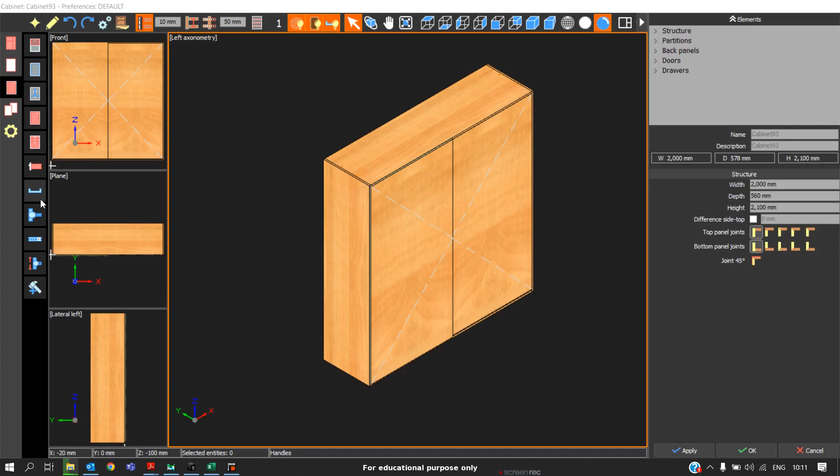Coming to the first hardware, that is the handle. When you click on handle, we can see multiple spots for inserting it. In isometric view there will be confusion, so we'll switch to front view and wireframe view. Now here we can see these are the spots for inserting the handle.

These are the spots for internal drawers, with this triangular cross section. In the opening of the door, this is the spot for inserting the door handle. After selecting, we must click insert.

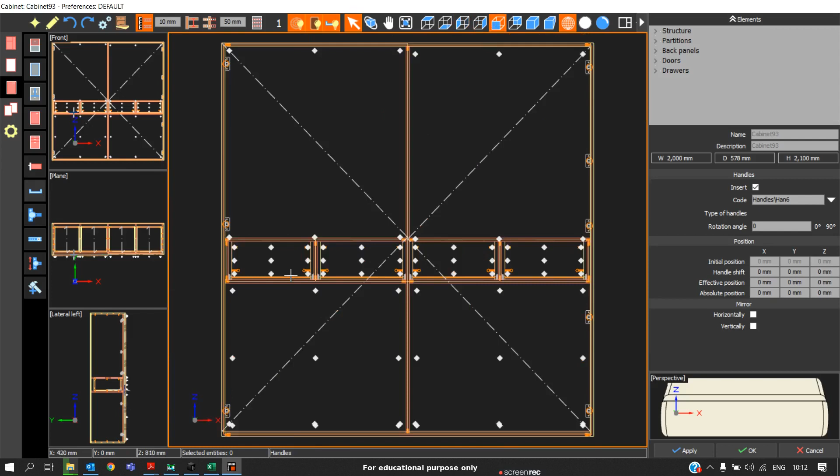We must select any model. In this case, I'll go with handle 6 for this drawer. I'll switch it to front view and click here. So I have inserted an internal handle here, and the handle is taken inside for the drawer fascia.

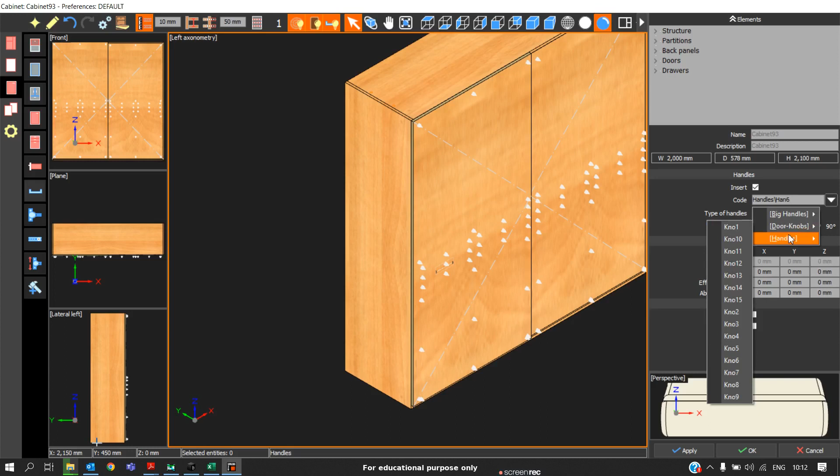The same way, now to insert for external, again go to handle, select any model, handle 1. I'll switch it to front view. After inserting, we can see the orientation is still not changing. We want to change it to 90 degrees, so click the rotation angle as 90 degree.

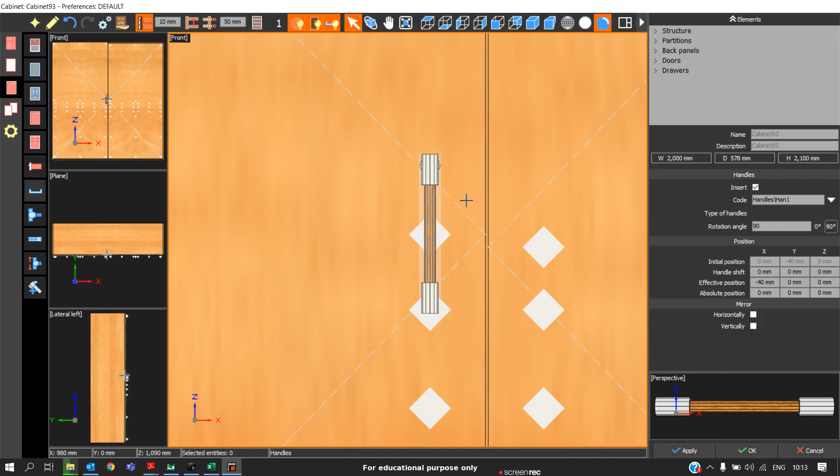Again, if you want to change the position of the handle along x, y, and z, that is also possible using the coordinates. For example, if I want to shift this handle along z to 100 mm, entering a positive value will move it up, and a negative value will move it down. So you can customize the position of the handle like this.

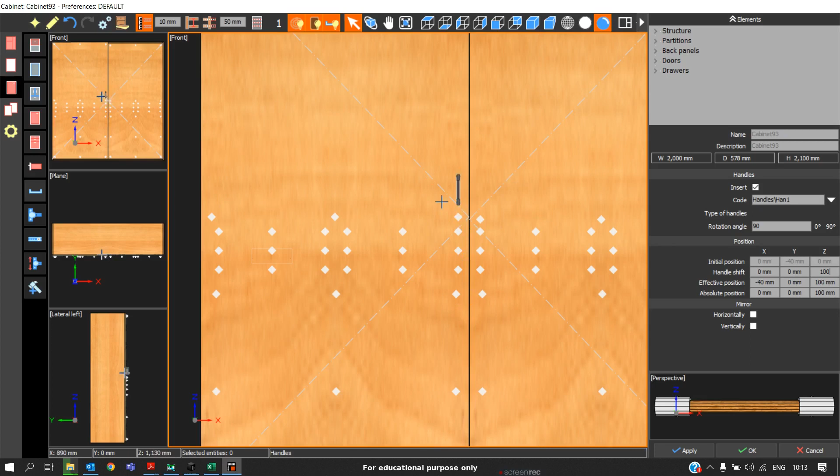And when inserting the handle, we'll notice we get the CNC program for the hole for the handle. So that's how we put the handles.

Now we'll talk about the hinges. When we talk about hinges, here we can see there are 3 hinges. There are options for automatic as well as manual hinge positioning. Here I have taken normal, without automatic manual hinge positioning.

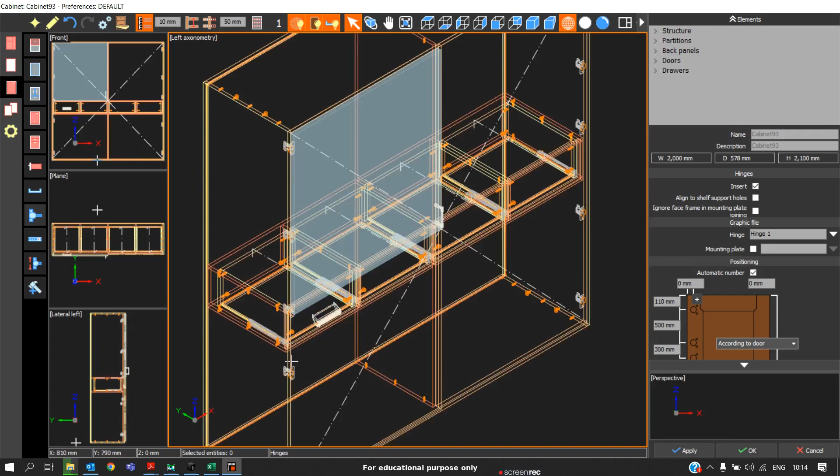If we enable automatic and click enter, we can see according to the length of the door, automatically the number of hinges increases. Here we can see 1, 2, 3, 4, and 5 hinges - it comes automatically, and the same way it appears on both sides.

But again, if you want to customize the number of hinges manually, you disable this automatic number. Here we must enter the number of hinges. It will initially ask for the upper position and the lower position of the hinges, and the total number of hinges.

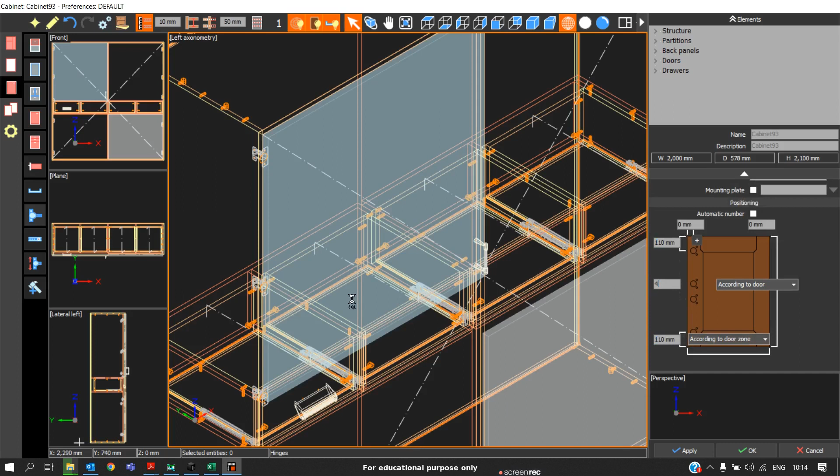So if I enter 4, we will get 4 hinges. You can see there are a total of 4 hinges. The distance between the top and this hinge is 110. Here it is 110 as well. So this is how we insert the hinges.

Again, in previous videos we know we can change the hinge positioning according to door and according to door zone. If you take only door zone, since the zone is only this much, the hinges will be taken only here. If you want to take it along the throughout door length, we should select according to door. So this is how we insert the hinges.

In some rare cases, we may need an additional reinforcement hinge. For large carcasses, for additional strength, we provide this type of hinge positioning. We click on this plus symbol and enter the value here.

When you click apply here, we notice we'll get an additional hinge at 220 mm from the top. This is done because, for a large carcass, most of the load will be on the top side. So to support that, we insert this additional hinge.

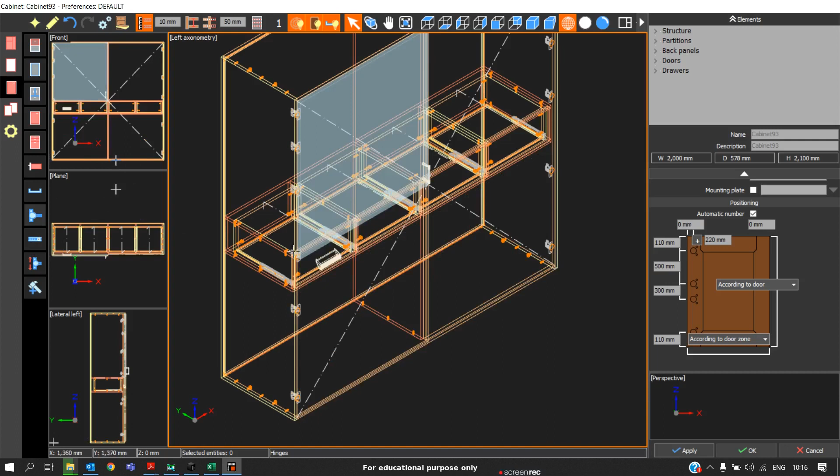Now, before I go to the drawer guides, I'll explain how to reposition these hinges. In this case, we can notice that this hinge is getting coincided with the partition here, the drawer box, which we must avoid during generation of the CNC program, because there will be overlapping of these holes and the positioning of the partition.

To reposition these hinges, we have the option called move hinge. We'll click on this move hinge, click on the particular hinge which you have to move, and just enter the value. If you enter a positive value it will move up, and if you enter a negative value it will move down. Enter.

50. So automatically the hinge will move at that particular distance. Here we can see the hinge is avoiding the collision with the partition. So this is how we insert the hinges and reposition the hinges.

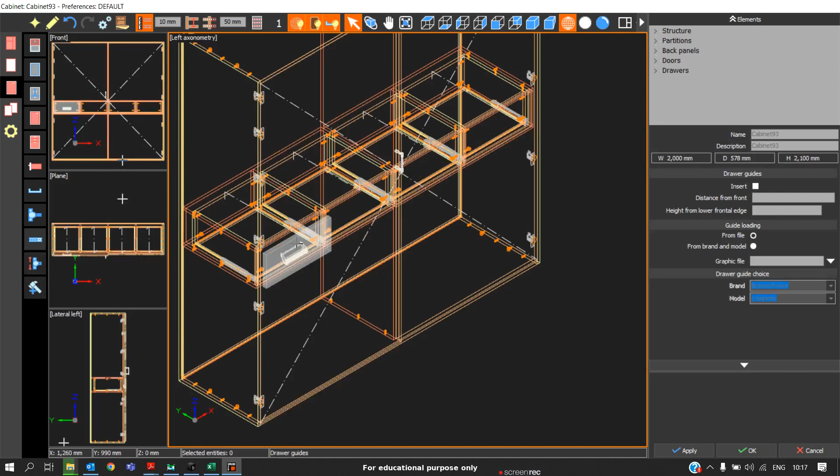Coming to drawer guides, when you click on drawer guides, we can see the drawer box zones get highlighted. By default when you click on this particular drawer box, the length of the drawer channel is 450. If you want to change the length and the model, click on the particular thing and click apply, and automatically the length of the drawer channel increases.

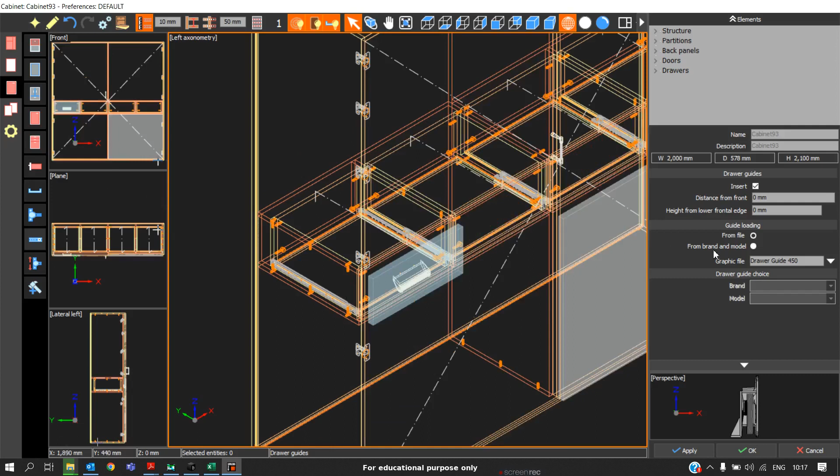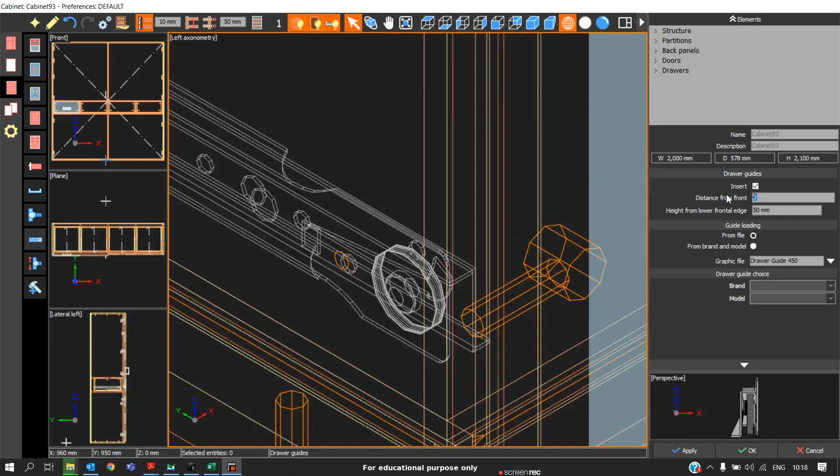Again, if you want to customize and move it above, we can enter the distance from the lower edge - if I want to move it 50 mm above, automatically the drawer channel will move 50 mm above. And if you want to shift these holes 50 mm from the front, or any distance you want, you can do that too. So this is how you reposition the drawer channels.

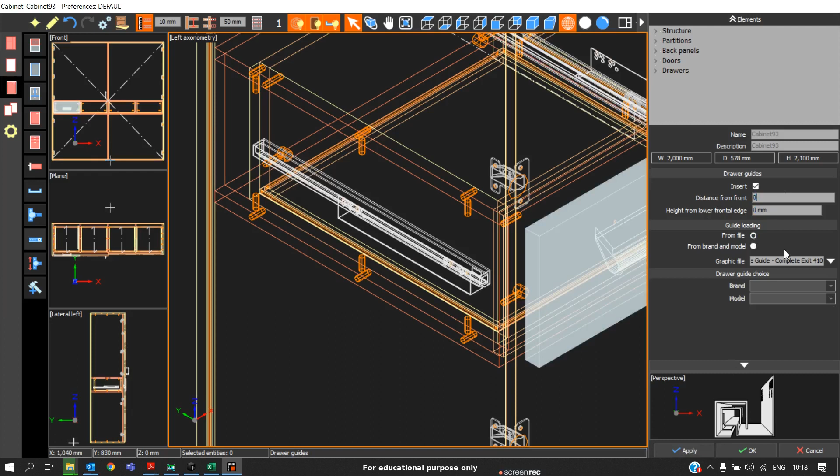There are also various types of drawer channels, invisible guides - that is nothing but under-mounted channels. You can use this also in your projects. In this case, we must remove this and click apply, since it is present at the bottom we will remove the height. So here we can see we have got the under-mounted channel.

So this is how we insert the handles, hinges, drawer channel, and reposition the hinges.